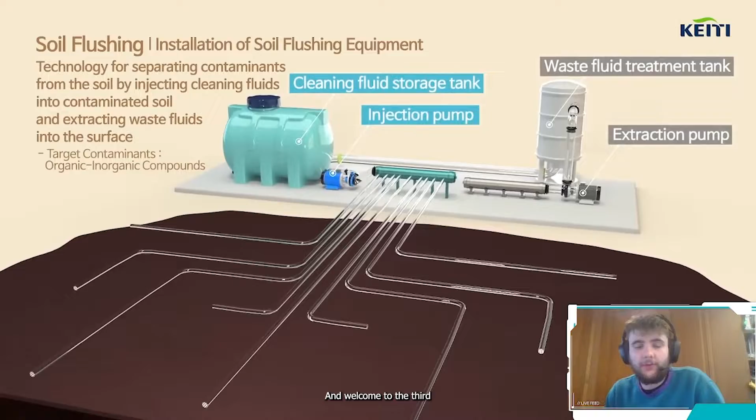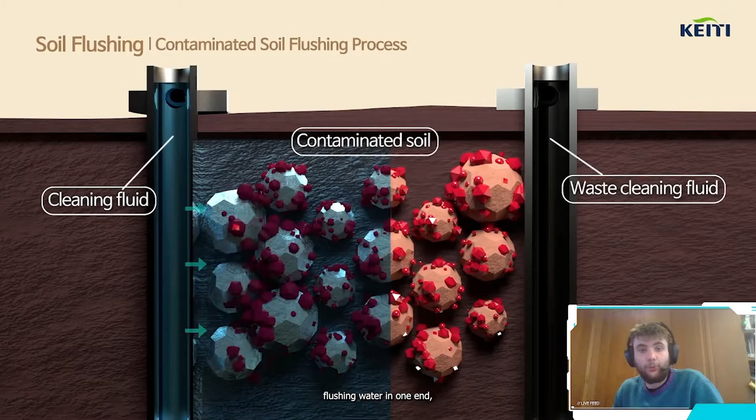Just to pick up where we left off, on your screen now is a diagram illustrating the process of flushing, which we discussed in the previous video with the agents Asimov and Akki: flushing water in one end, cleaning the contaminated soil, and then extracting this liquid from the other end. This liquid can then be recycled.

Jumping back into the leaked document, this is the third part, the third of four. We can see here there's some kind of blueprints, a series of these sketching out system diagrams. What's interesting is this first one is called Agent Ecology.

I think this starts to give us an idea of how Asimov and Aki actually work together and how they flush. We see here contaminated soil is excavated, then the hydro flushing. Asimov seems to carry out the first part, and then Akki is deployed and carries out the second part. So there's a symbiosis between the agents as well as between the humans and the agents.

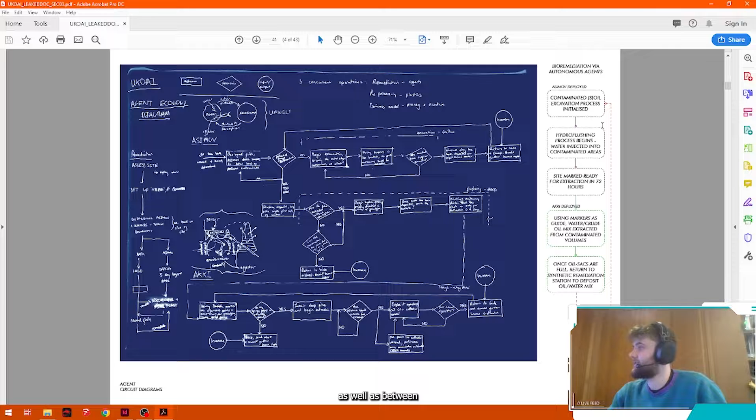And then we see on this page the synthetic remediation system. Part of the SRS is to deploy the agents Asimov and Akki. So when they've collected this contaminated water/oil mix, they feed this back into the synthetic remediation system. Once the oil deposit within SRS has reached 80% of capacity, the first stage of the conversion process begins.

So we're getting an idea here - it's evidently responsible for collecting the crude oil, the waste crude oil that the agents have collected from the site, and then converting it, ultimately, into PTFE.

And then interestingly at the bottom here it says remediated land facilitates a tax break and financial incentives under a new waste directive. So the incentive for the UKOAI to remediate the site is, I guess, to promote remediation through artificial intelligence. We see here the synthetic remediation system turning the crude oil waste into ultimately profit for whoever uses it - I'm not quite sure who's designed to use it at the moment.

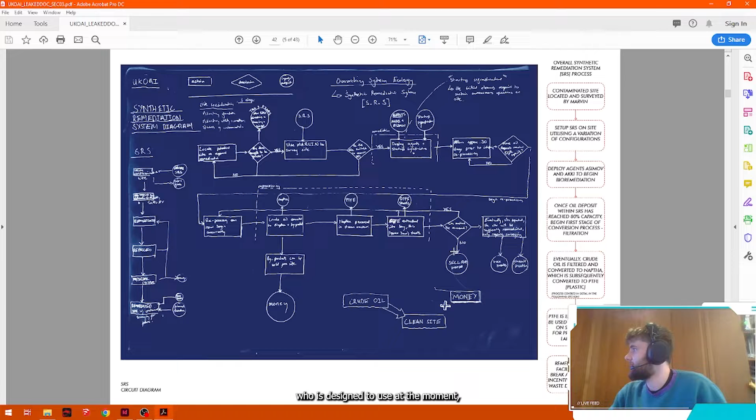We can see here, waste oil to synthetic plastic. This is the actual process of turning waste oil into what looks like naphtha. The waste oil is filtered, distilled, boiled and separated into naphtha, which can then be sold as a raw material, or fed through a steam cracker, and then the steam cracker feeds into an extruder, which subsequently creates PTFE. So interestingly, you can effectively turn waste crude oil recovered from the site into plastic or other saleable raw materials.

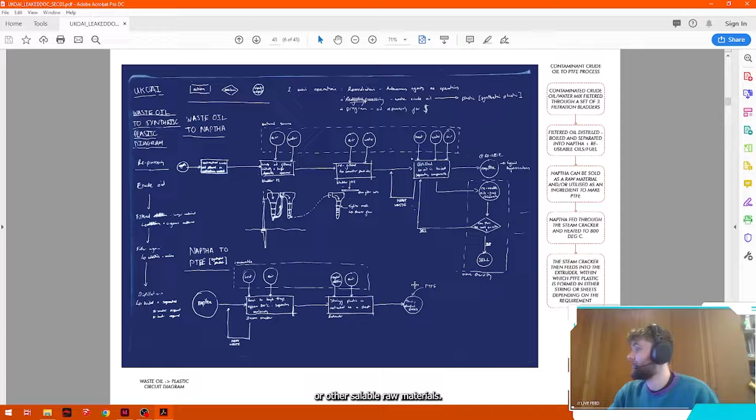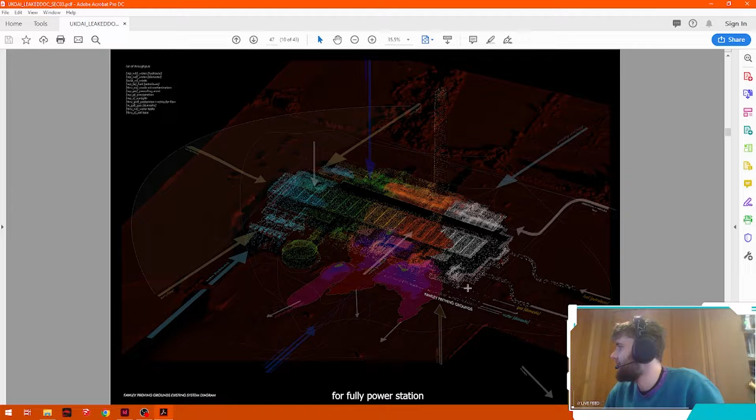So this is where it starts to get really quite curious. We see the point cloud for Fawley Power Station that we discussed before, but overlaid is a set of what seems to be drivers. In the top left corner there's inputs, outputs varying from water, prevailing wind. It seems like these are existing outputs on the site as it was post-demolition, just with the foundations, and then the environmental drivers.

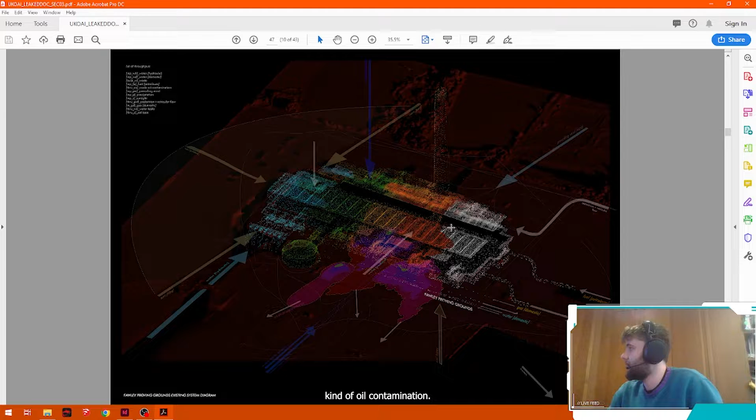What's interesting here is there's a section that seems to be sitting directly in front of this oil contamination. So what they've done is take that point cloud section, this orange section, and used a meshing process that seems very similar to what we saw on the chimney, and applied the same drivers as the previous page but more specifically to this smaller section. And then this page begins to explain exactly what they're doing with this information.

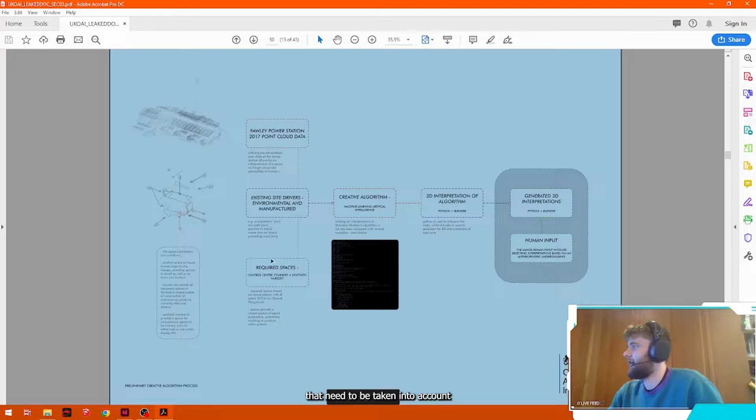So we see here the 2017 point cloud data pre-demolition, the drivers we discussed post-demolition, a set of required spaces, and then a set of parameters for these spaces. These three elements are then fed into a creative algorithm. So you're telling an artificial intelligence, basically: this is the space I have, these are the drivers that need to be taken into account, and these are the spaces required within the space it's been fed. And then we can see there's a little excerpt.

I wonder if we can actually get a glance at the code itself. If we look here, we can see an excerpt from the creative algorithm itself. I'm not a coder, so I'm not one to pick this apart, but it's interesting that they're using this kind of machine learning process to effectively design a set of spaces utilizing existing drivers on site.

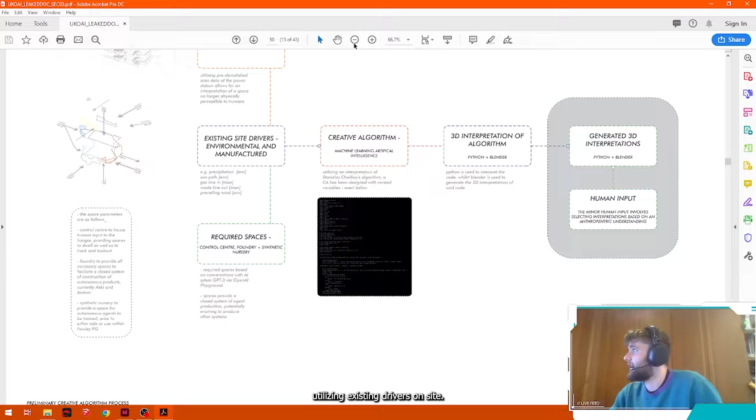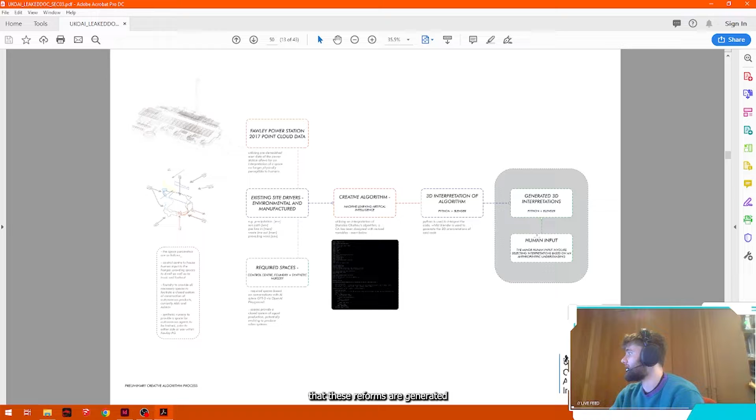So the creative algorithm interprets these spaces and chucks out a set of parameters, and then Python and Blender seemingly interpret these parameters, and then these 3D forms are generated and human input plays a part. So it's seemingly a very AI-centric design process with a touch of human input at the end.

And then we can see here the final output from these. So that was the original point cloud that we saw here, interpreted as a mesh. So then that mesh point cloud has seemingly been translated into 3 suggestions as to what these 3 spaces could be.

The 3 spaces: control centre, factory, and synthetic nursery. You know, a factory and a nursery to build something and then to train it, perhaps, and perhaps they're building agents, the likes of Marvin, Aki and Asimov.

So what's interesting is we can see the suggestions, and then there's a constellation that's been selected through human input. So although it is a very AI-centric design process, there is still a touch of symbiosis. Yeah, the colours are quite curious.

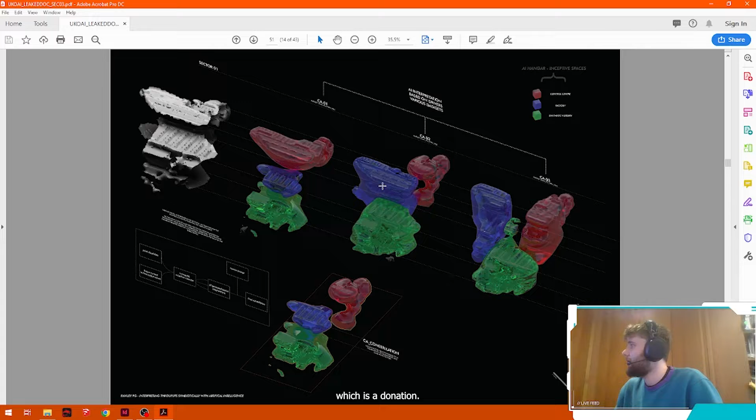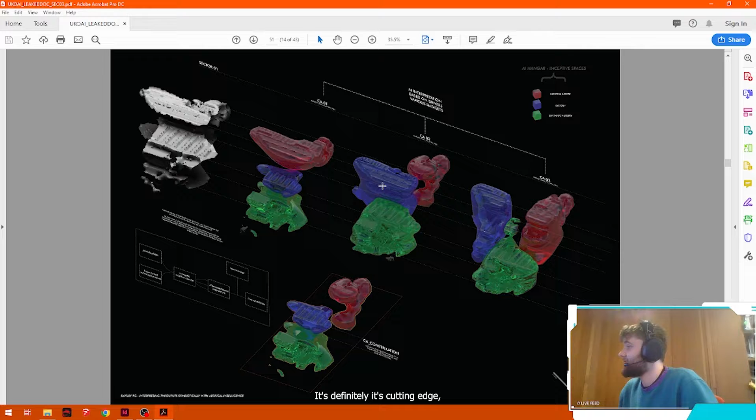Yeah, it is quite unnerving stuff. It's definitely cutting edge, I guess you'd say. As I mentioned, there is still a small human input, so I guess we'll see, this might be the future. It's interesting, they're looking at AI generated images and then seemingly how they can turn into an AI suggestion of materiality, perhaps.

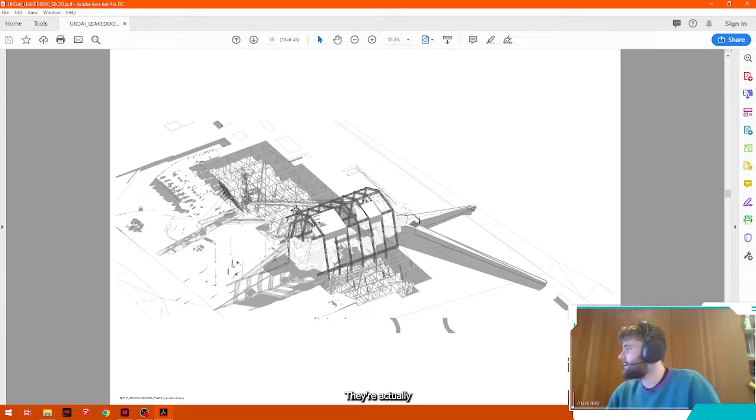Yeah, so this is really interesting stuff, Uncoverers, because this is the first time we see the kind of research placed on site post demolition. So we can see those AI generated spatial interpretations actually being suspended here within, I think, what could only be described as a hangar. This large hangar with an extensive array of cabling would suggest it's perhaps adaptable, transformable.

The nature of AI leaves opportunity for a lot of growth, so perhaps they've had to leave it open-ended and allow for a certain amount of transformability within the structure itself. That would explain the kind of pulley systems.

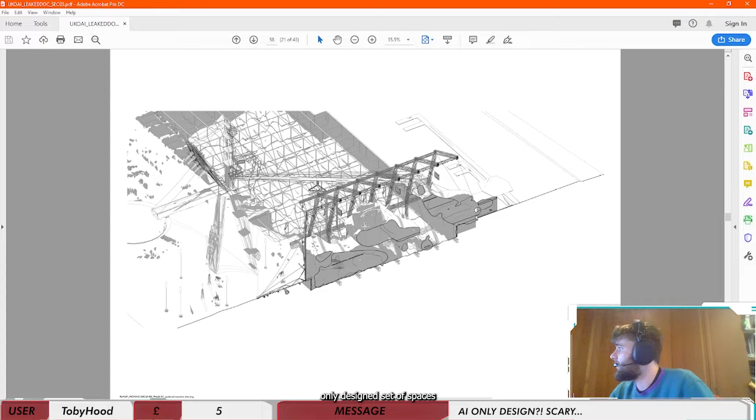Yeah, so it's interesting. This seems to be an AI-only designed set of spaces, and then now suspended within this hangar structure. And then we can just see here in this exploded diagram just a quick breakdown of the hangar sitting above the blobs, and then all of that mounted to the existing foundations within Fawley Power Station.

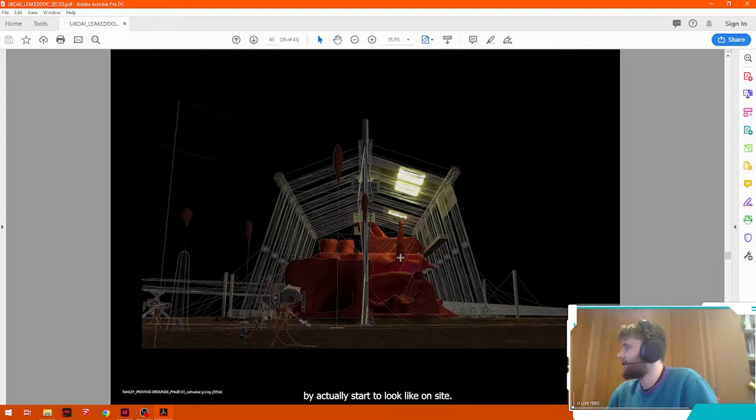I'm not sure about you guys, but these images quite excite me because I feel like it's the first time we can see what the physical manifestation of this previous research might actually start to look like on site. These blobs look pretty interesting to me. It must be an incredible experience to be within one.

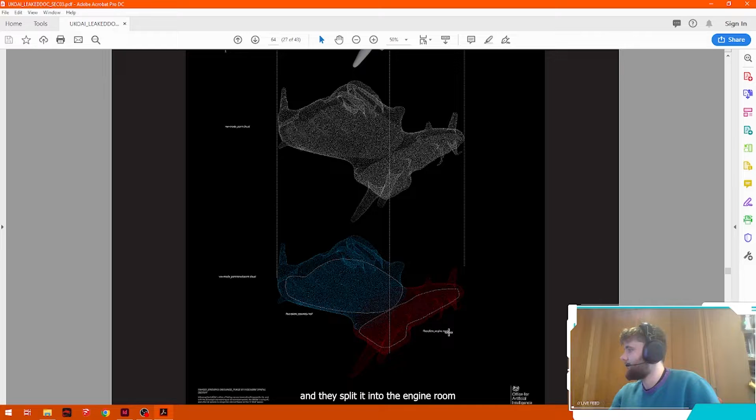And interestingly, the AI-driven design processes don't stop there. So they've taken the three blobs, those three spatial interpretations, and taken this middle one, which was the factory, I believe. And then this factory they've split into two main floor plates, the engine room and the assembly hall. So that's given them two sets of parameters to work within.

So we can see here the engine room on the right and the assembly hall on the left, and seemingly similar to the previous point cloud process, there's a set of drivers. It seems to be some form of intakes on the outside edge, and then some capture system on the top. And then we can see on this image on the right, there's inputs and outputs through these kind of holes.

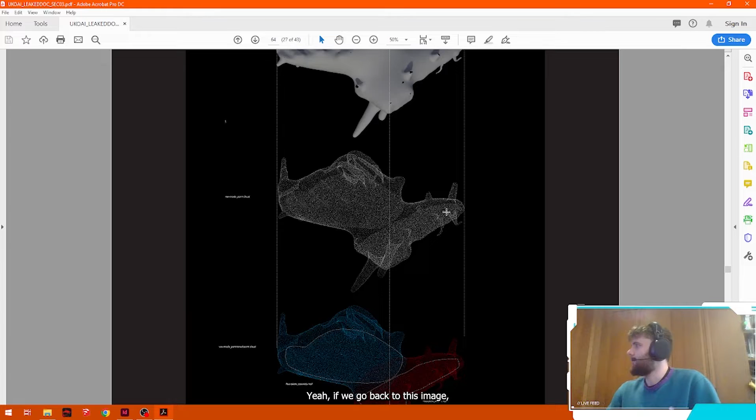Yeah, if we go back to this image, we can see these kind of spindly tentacles almost hanging from the underside, so perhaps that's what those holes represent.

And then we can see here, so this was the engine room from that previous design, but this large set of code. So it seems that they've used a similar process to the blobs, using AI machine learning to generate a suggestion of how the space should be laid out. And here we can actually see the manifestation of that suggestion.

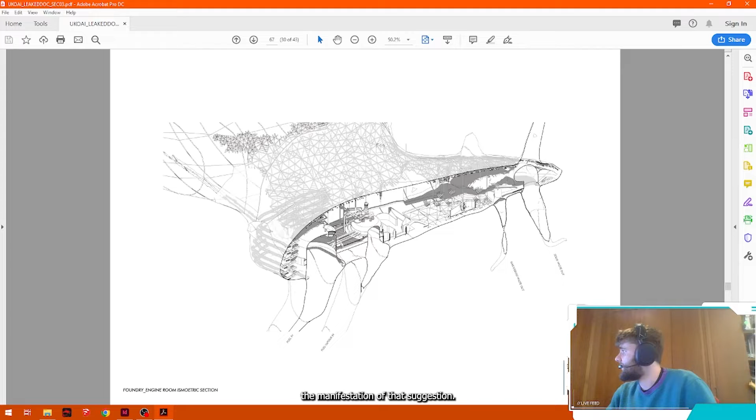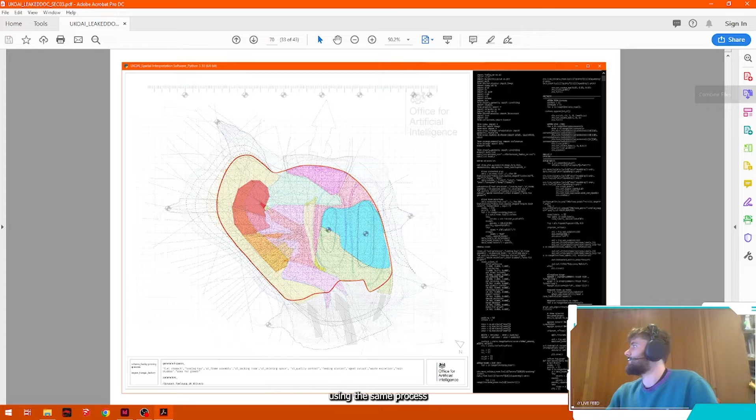So the fuel inputs are here, the waste in that back corner. So this whole space has effectively been designed by AI, from the outer skin through to the internal, using the same process as the engine room, this creative algorithm, but again we can see a different set of spaces down here. So instead of waste store etc., we're looking at fuel stomach, loading bay, agent output.

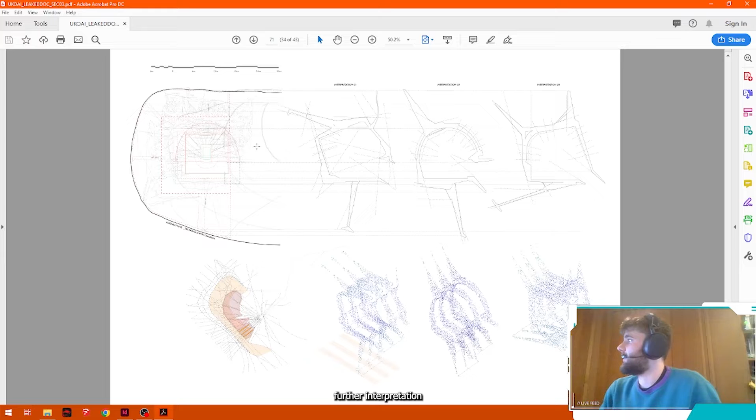Okay, so agent output's an interesting one, because that makes it obvious that this assembly hall is an assembly line, at least initially intended for agents to help create these. Then we can see here what it looks like with further AI interpretation of how the assembly line structure would sit, and the kind of output from that interpretation, which is really interesting stuff. I think this image does a really nice job of just summarizing what we've been looking at.

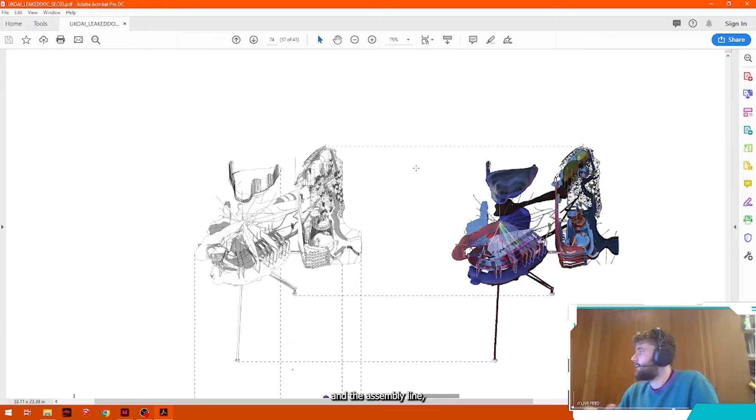So we can see the middle blob, as we discussed, the factory, and then this set of internals that have been generated through AI driven processes. This kind of strange structure we see is effectively an AI suggestion or interpretation of how a factory would be laid out, including the engine room and the assembly line, which is really curious stuff, and I don't think a human would have laid out a factory that would look anything like this.

So in those circuit diagrams that we looked at earlier on in this leaked document, we saw mention of a synthetic remediation system, and it seems like this is actually that structure itself. So we can see here at the bottom there's an oil capture unit and an agent maintenance bay, which is this, evidently this section here, and then filtration bladders.

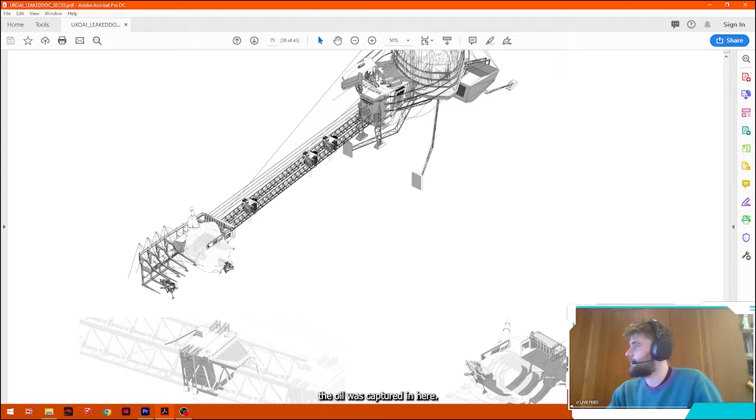So these seem to run this kind of frame, this long frame that kind of runs up. We can see three of them, so the oil is captured in here, the agents deposit the oil water mixture, and it's then filtered through here into this structure here, the distillation unit. So the oil and water mixture is distilled in this unit here, and then in this pan here we have naphtha, which can either be steam cracked and extruded into PTFE or sold by itself as a saleable product.

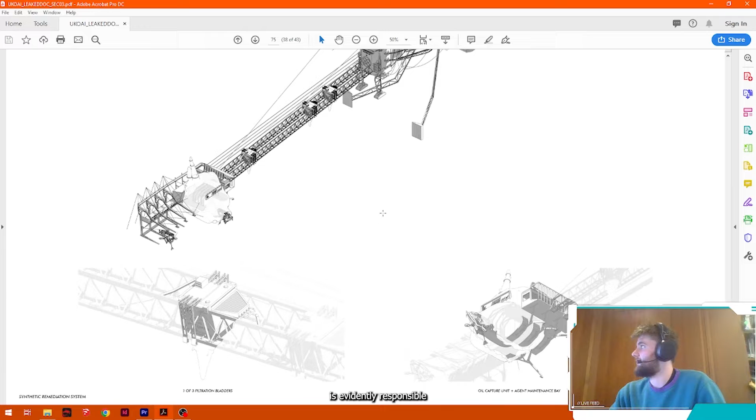So this synthetic remediation system is evidently responsible for turning contaminated crude oil into either plastic or a saleable product through the assistance of these agents. Asimov and Aki are responsible seemingly for this kind of autonomous process, which then connects into this synthetic remediation system.

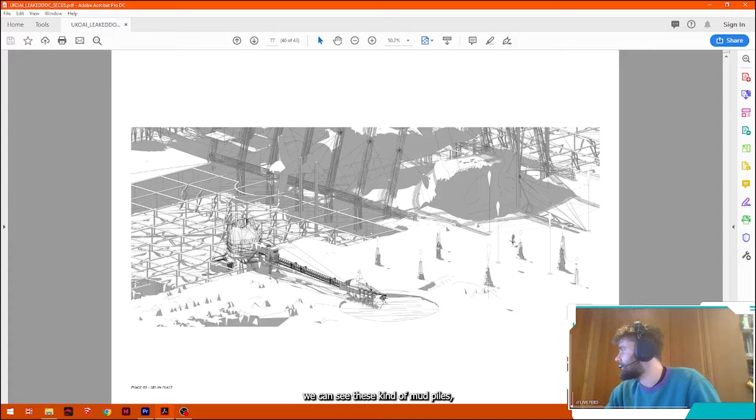And this image just gives us a sense of perspective, how large the AI hangar is in the background with the blobs within. And then on the right here we can see these kind of mud piles, which are presumably the remnants left behind the excavation process that Asimov undertakes.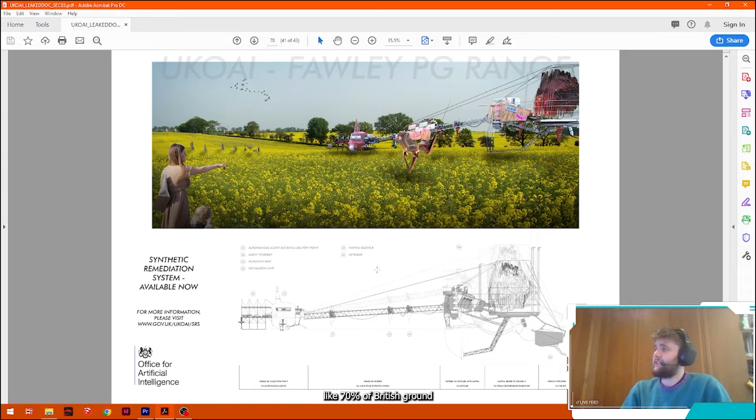And then so what's really interesting about this page here is we see PG range and available now. So it's obvious that this SRS is going to be some form of saleable product. Presumably landowners can use it to remediate contaminated land if they happen to have instances of contamination. I think it's something like 70% of British ground is in some form contaminated, so that would explain why you'd want to have this structure that you could deploy on site and remediate the site.

Presumably that remediation would also bring tax incentives and benefits with that new kind of waste directive that we discussed in the previous circuit diagrams.

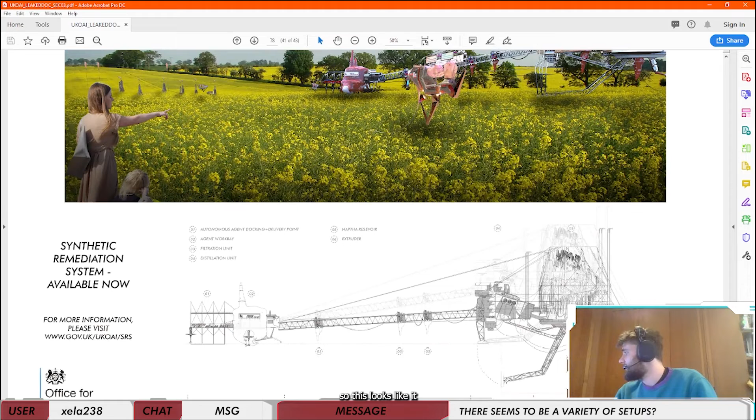xela238 in chat has mentioned that there seems to be a variety of setup. Yeah, I think you're right. If we look at the bottom right here, we can see, so this looks like it's set within the foundations of the basement, so this is the kind of Fawley setup. But then in the background there, we can see another setup which presumably would be suitable for flat ground. Presumably that is the setup that we utilised on a kind of normal field site as pictured above here.

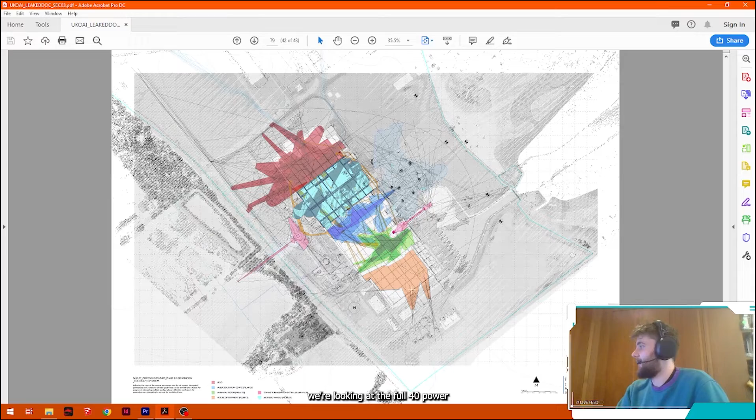So looking again at machine learning AI and kind of spatial interpretations and suggestions, we can see here we're looking at the full Fawley Power Station foundations. If we look at the bottom left here, I think we can actually see the different spaces.

Yeah, so we can see here plug, public education centre, synthetic remediation system, financial sector and artificial hangar, which explains, as well as providing testing beds, to test different forms of AI through the artificial hangar, which was AI centric, and the synthetic remediation system, which is kind of symbiotic with autonomous agents and humans.

The public education centre seems to serve as kind of the communication of AI towards the general public, as opposed to, so it's not only a testing bed for the AI, it's also a method of communication between AI and the general public.

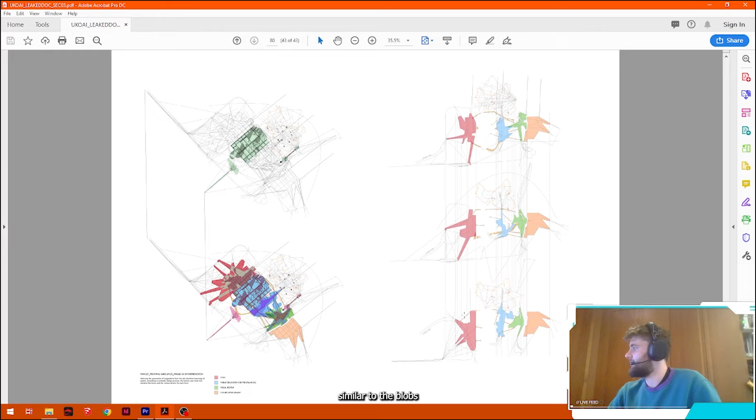Yeah, and then on this last page here we can see the set of suggestions from the machine learning algorithm overlaid over each other there, and then presumably there'll be some form of human input similar to the blobs, kind of a constellation, to pick the best suggestion based on human understanding of the site and its limitations.